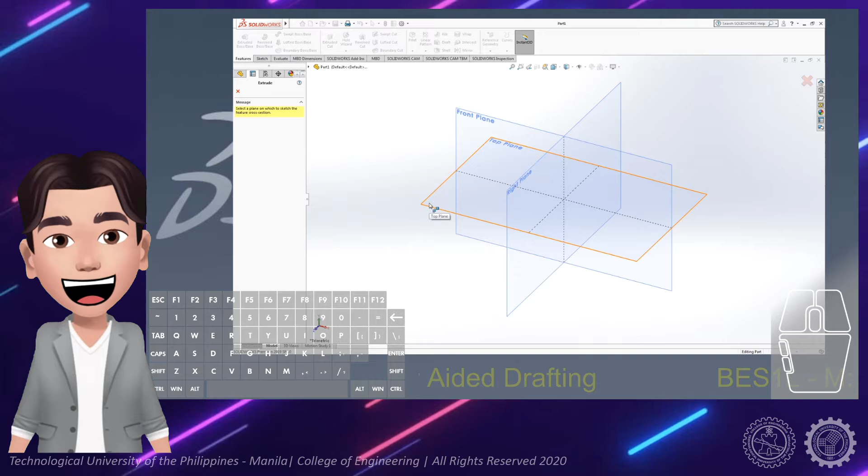Select Extrude Boss Base under the Feature tab. Then you can select from the drawing area for the initial planes, such as front, top, or right plane. Let us select the top plane.

Automatically, the drawing projects the top plane. That will lead us to the construction of the 2D base model. In our case, we will construct a 10 by 10 inches square base.

In the middle of the drawing area, you will see a perpendicular arrow, which is the X and the Z axis, and the intersection, which is the origin.

Let us construct the square using the line icon under the Sketch tab. Click the line icon. When I say click, it is the left click on the mouse, or follow the mouse button highlighted on the screen.

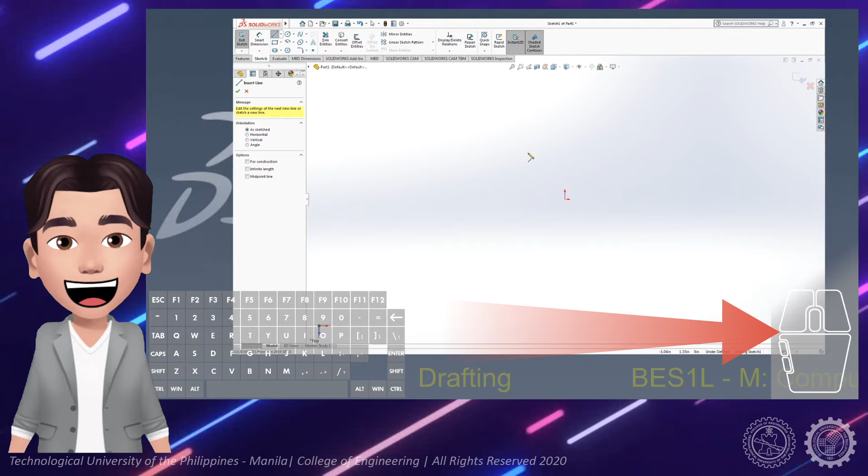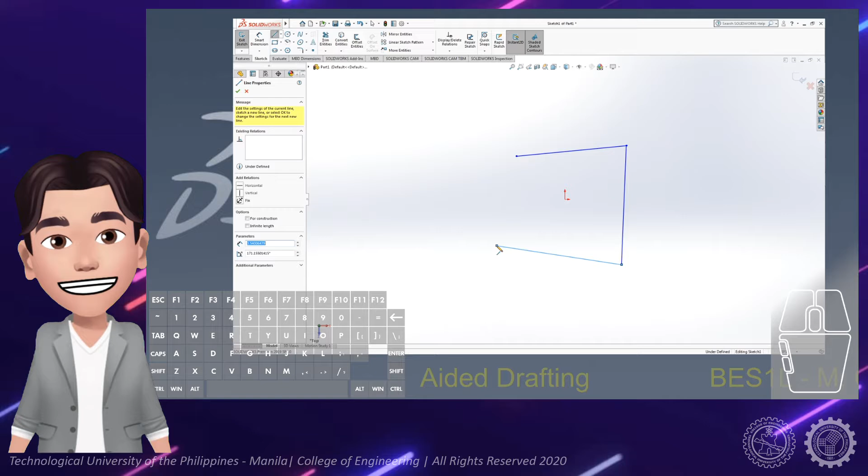Next is to select an initial position for the line on the drawing area, or the endpoint of the line. Then click another position for the other endpoint of the line. Then next is the third position, which is the endpoint of the second line. Then fourth position, and lastly, close the figure by clicking the initial endpoint.

You will see an indicator on the screen stating that you are selecting the endpoint of a line. There you have a quadrilateral, and the enclosed region is highlighted. That means it is a closed figure.

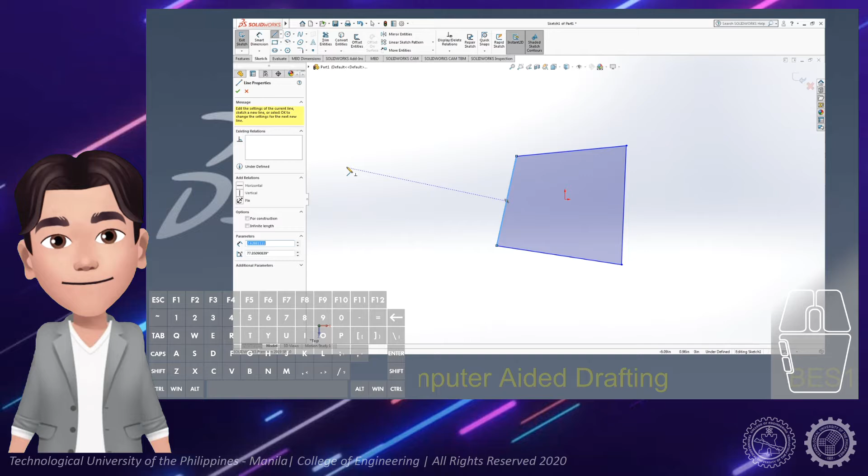Next is to make the lines horizontal and vertical. By placing the pointer on one line, then press right-click to make it horizontal. You will notice an indicator that the line is now horizontal.

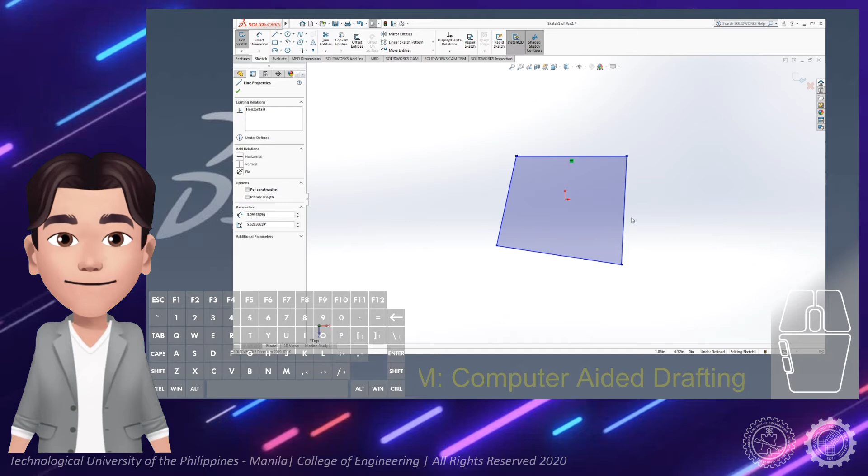Then, place the cursor on another line and press right-click. This time, we will make vertical. Do the same to the other lines to make a rectangle.

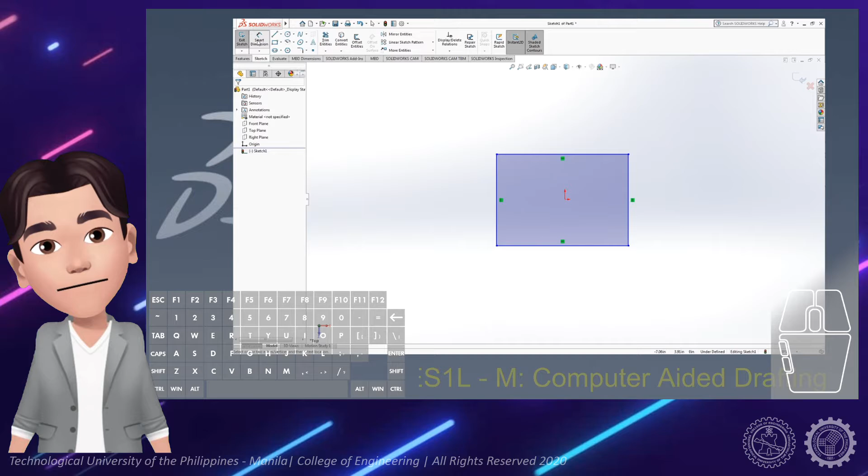To be able to make a square, let us insert the dimension in the 2D model. Click the Smart Dimension icon, then click a horizontal line and another click for the position of the horizontal dimension. Type in the dimension in the small window. Let us type 10 inches and press enter.

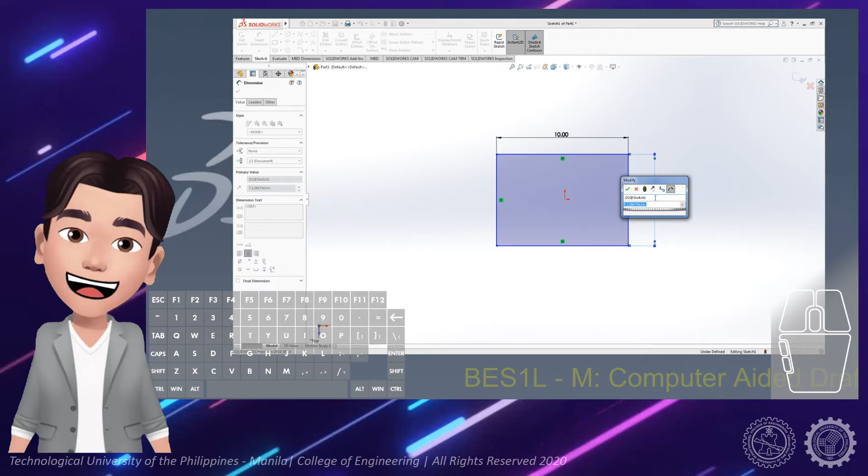Then click a vertical line and another click for the position of the vertical dimension, and type the dimension 10 inches and press enter. Press escape to exit Smart Dimension.

The lines that we have is blue in color. It means that the figure that we have is underdefined. To make it fully defined, we must have a complete dimension and must have an exact position.

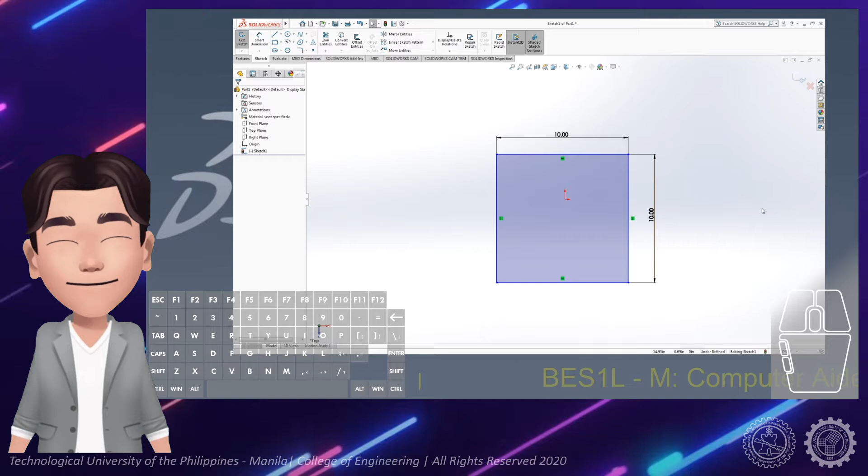Since we have a complete dimension, we only need an exact position. When we click and drag a single line, the entire square can be moved to any position, as shown in the demo. Let us have the position of the square, wherein its center is at the origin.

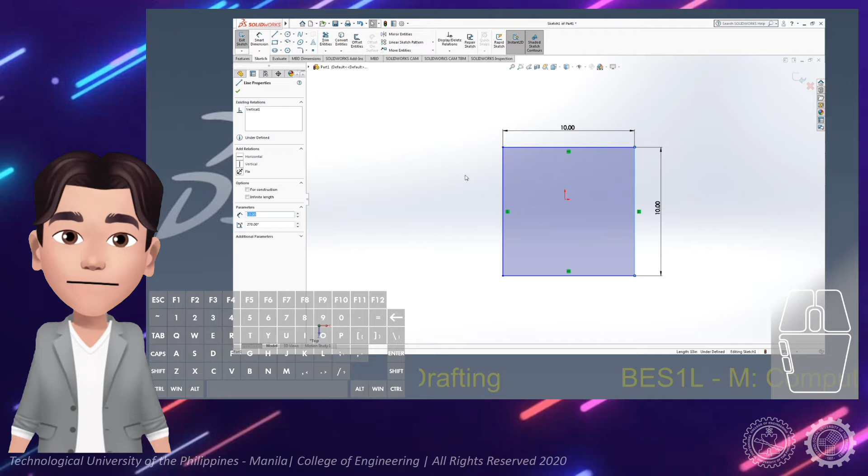To do this, we must introduce a relationship by clicking the arrow down in the Display Delete Relations, then click Add Relations. Then on the left side of the screen, you will see the Add Relation tab.

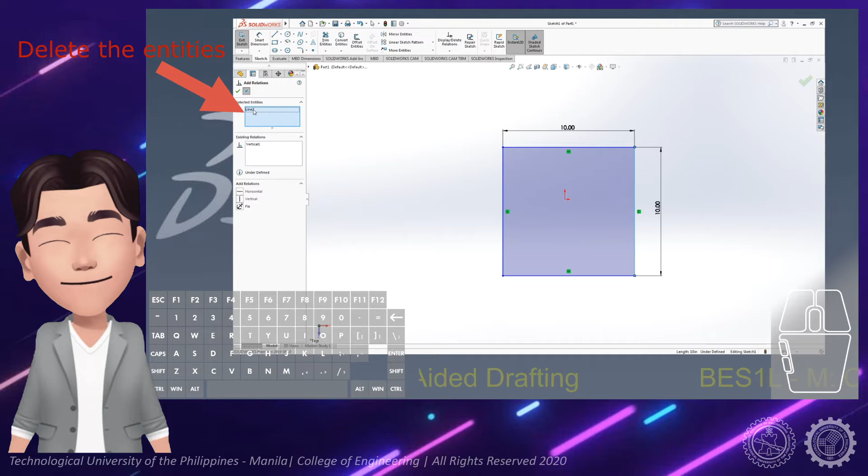Then click the origin. Next is place the pointer on the vertical line, then press right-click and select midpoint. In the Add Relation tab, click Horizontal.

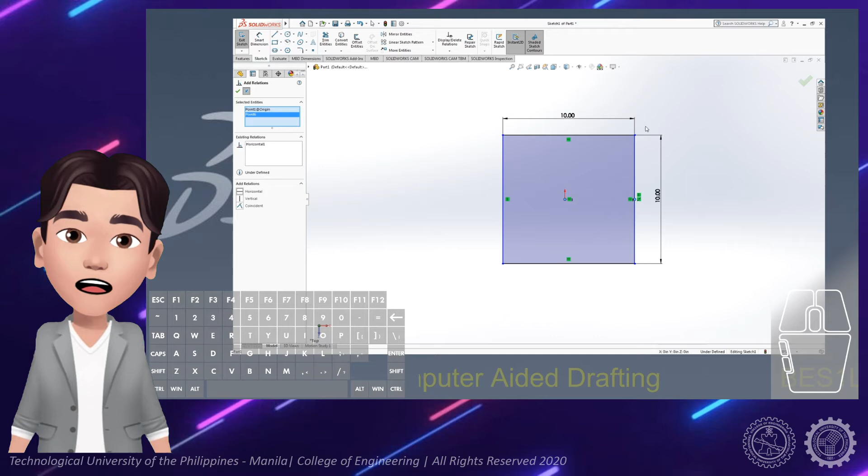Then, the vertical line is now positioned in the middle, and the horizontal line turned to black lines, meaning we can only drag or move the square to the left or right position.

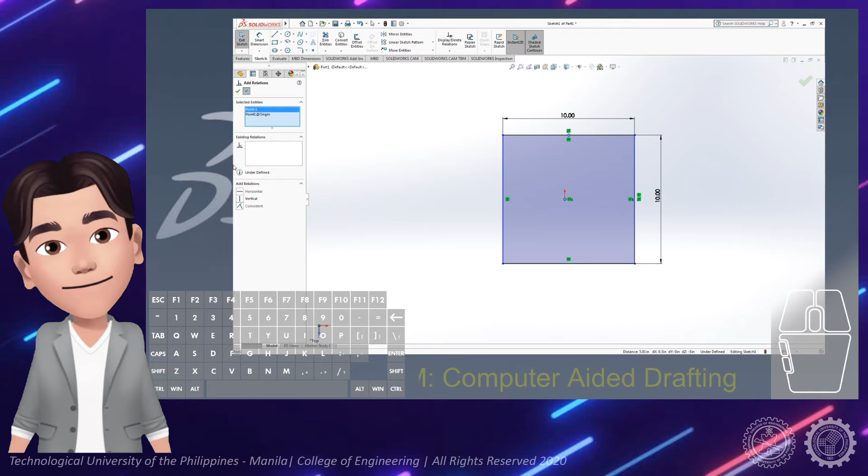Again, in the Add Relation, click the origin and select the midpoint of the horizontal line, and click the vertical align. This will make the center of the square intersect with the origin.

The lines are all black, which means that the figure is now fully defined, which is also stated on the lower right portion of the screen.

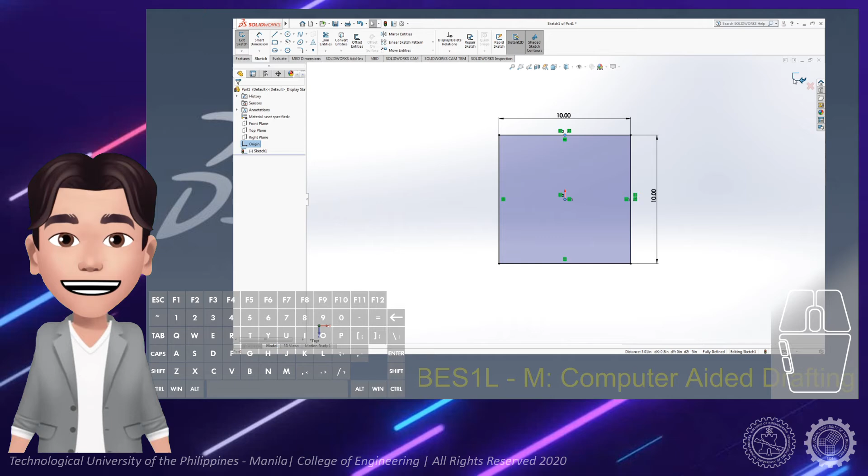Now, click the Exit Sketch button on the upper right portion of the screen. Do not press the X or the close icon.

Then the orientation will go back to the 3D view. Here, we have a flat square base. Next is placing a depth.

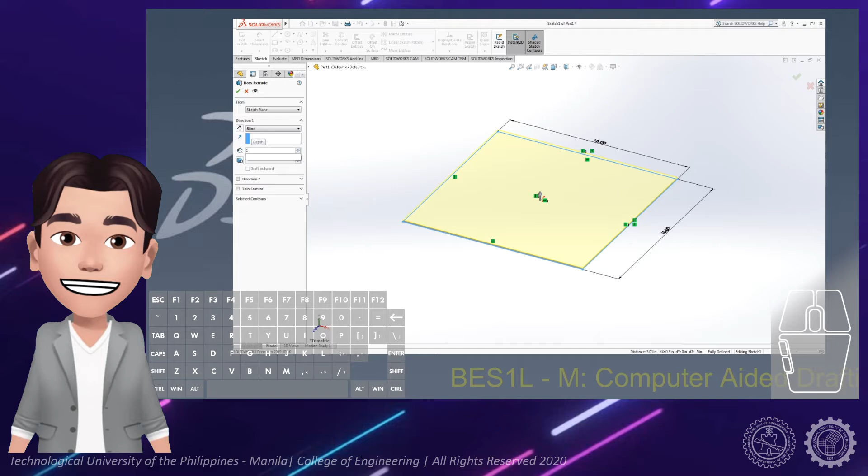On the left side, you can type in your depth. Type in 10 inches, then press enter. We will have a preview of the output cube.

By clicking the reverse button, you can have the depth pointing on the other side. But we will position the cube in the middle.

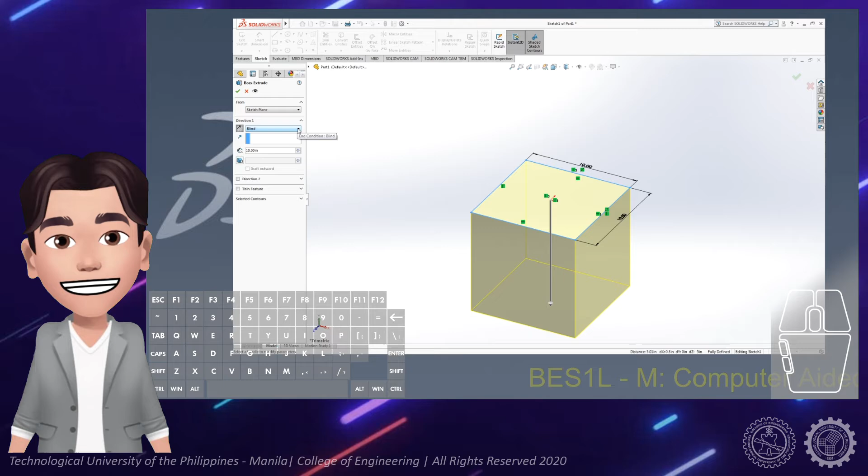To do this, click the arrow down on the blind and select midplane, and click OK or the green check icon on the upper right portion of the screen.

There you have our 10 by 10 by 10 inches cube. And the feature name is Boss Extrude 1, shown in the Feature Manager.

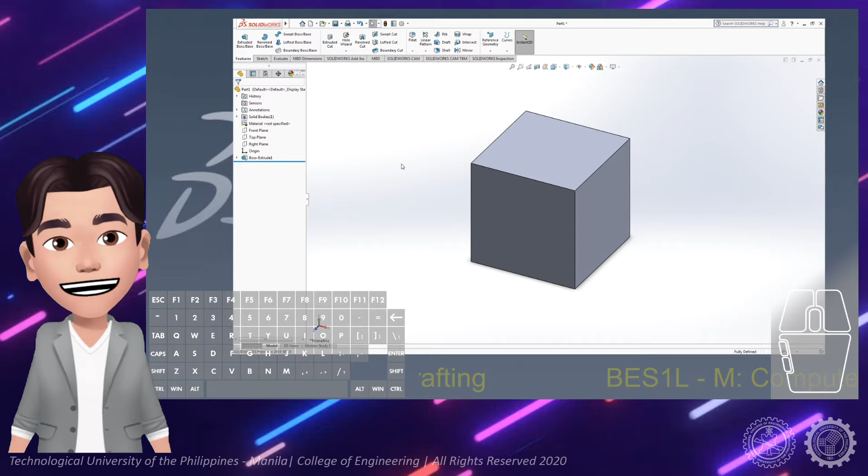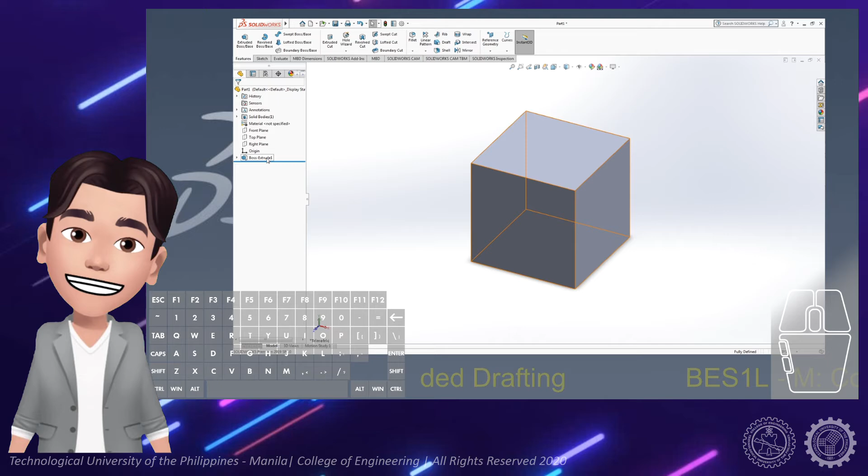What if our final model is not a cube, but instead a 10 by 10 by 5 inches square prism? We do not need to construct a new 3D model, but instead just edit our initial model. In the Feature Manager tab, right-click Boss Extrude 1 and click Edit Feature. This brings us back to giving depth to the flat square base. Change the depth to 5 inches, press Enter, then click OK. Automatically, the 3D model adjusts to the new dimension.

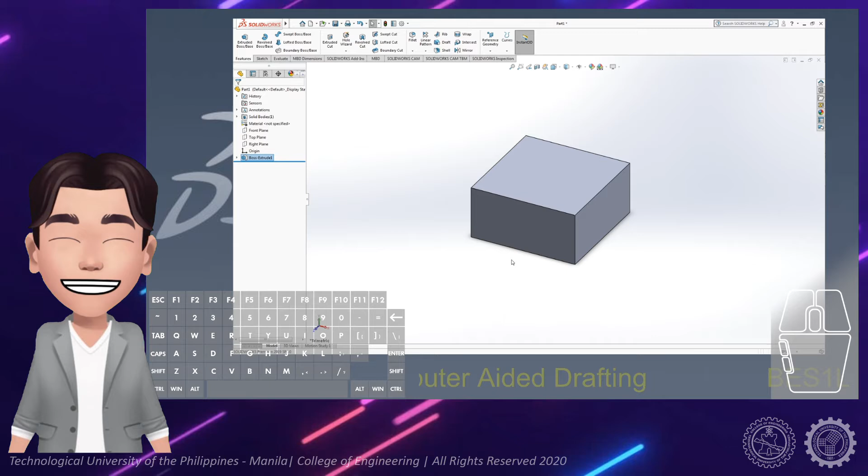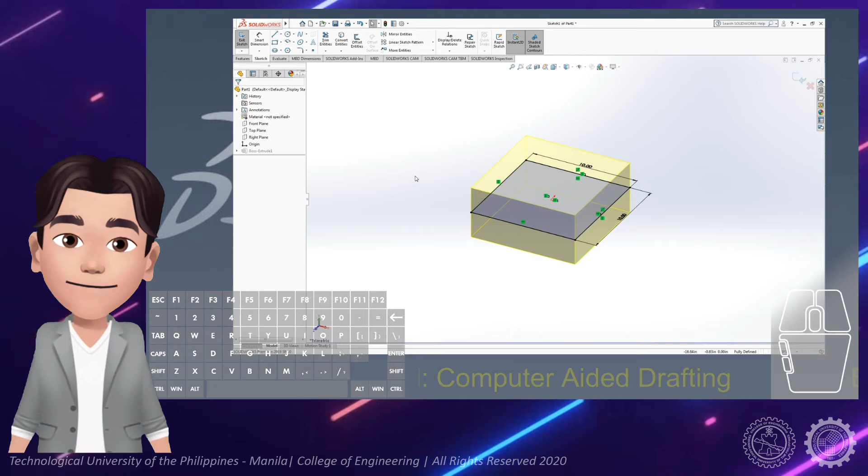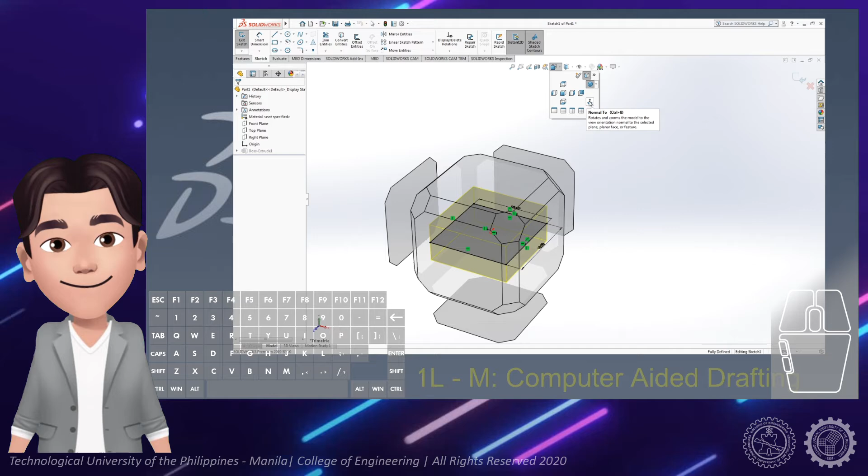But what if the base of our 3D model is not a square, instead a rectangle with dimensions 12 by 8 inches? Right-click Boss Extrude 1, and this time select Edit Sketch. This brings us back to sketch mode in 3D view. You can switch to 2D view by clicking the view orientation and selecting Normal To, or the arrow up icon. Click the dimension to edit, type 12 inches and press Enter, then edit the other dimension and change it to 8 inches. Click Exit Sketch, and now we have a 12 by 8 by 5 inches rectangular prism.

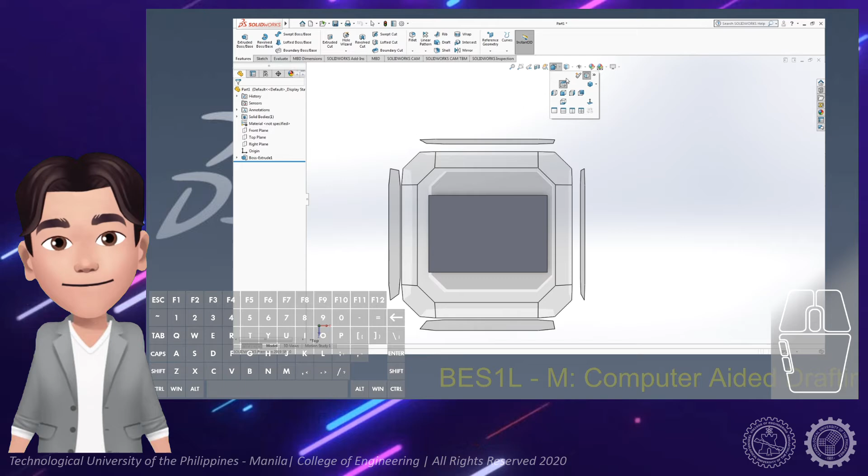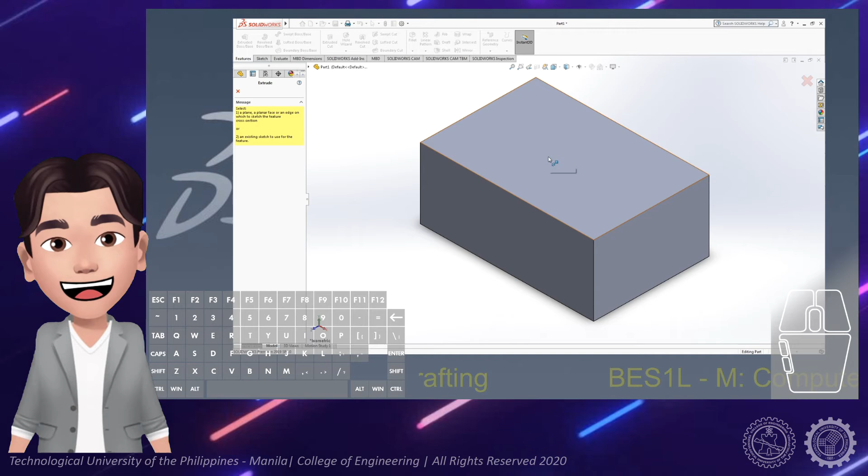Let us add a cylinder on the top of the prism with 4 inches diameter and 5 inches height. Under the Feature tab, click Extruded Boss Base again. This time we can select from the incident planes generated by the prism, aside from the initial planes we had earlier. Click the top incident plane of the prism, then click View Orientation to select Normal To, or press Ctrl 8.

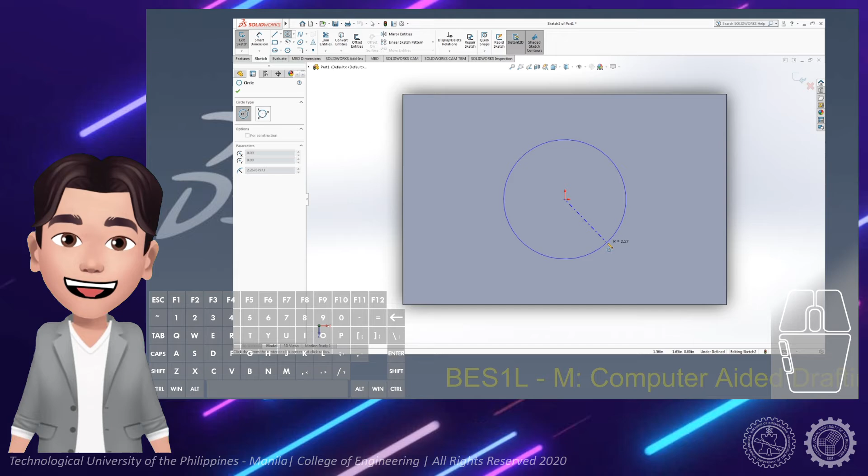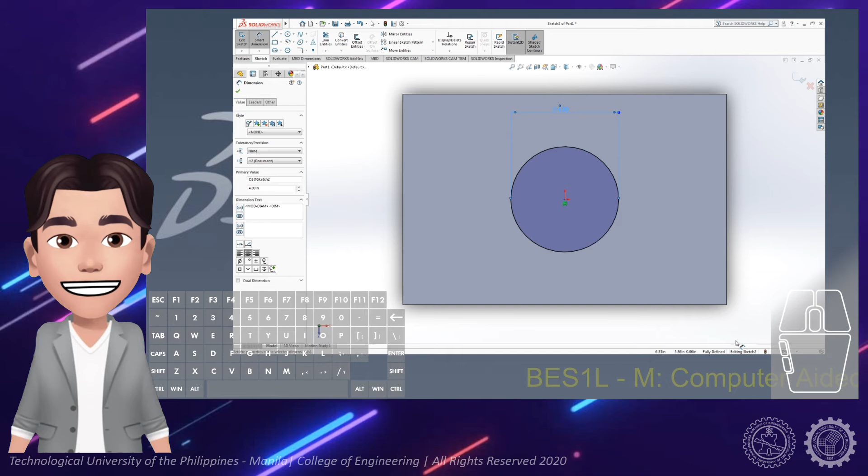Let us create a circle using the circle icon in the Sketch tab. Click the projected origin; this will be the center of the circle. Click another position to make the circle, then click Smart Dimension to introduce a dimension for the diameter, and type in 4 inches. The circle is now fully defined since we have an exact position and dimension. Click Exit Sketch—do not click the X or Close button. Then in View Orientation, click Isometric or press Ctrl 7 to view the 3D model.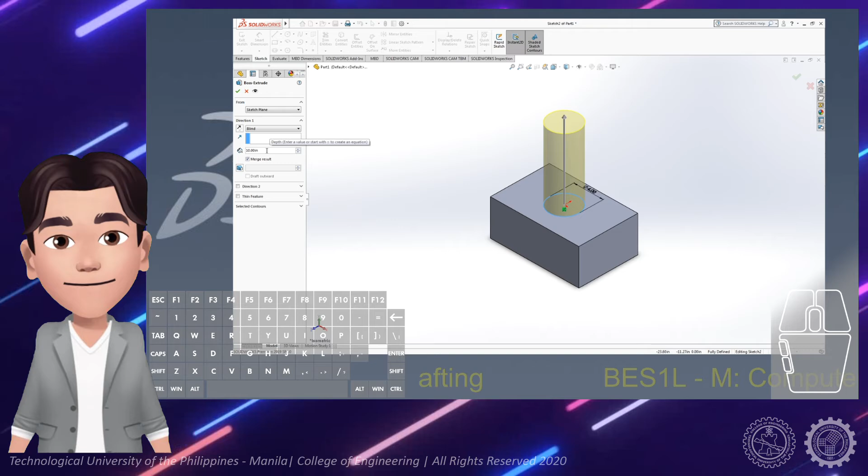Now we will introduce a depth to the cylinder. Type in 5 inches and press Enter, then click OK. Now we have added the cylinder on top of the prism. The cylinder is under the name Boss Extrude 2 in the Feature Manager.

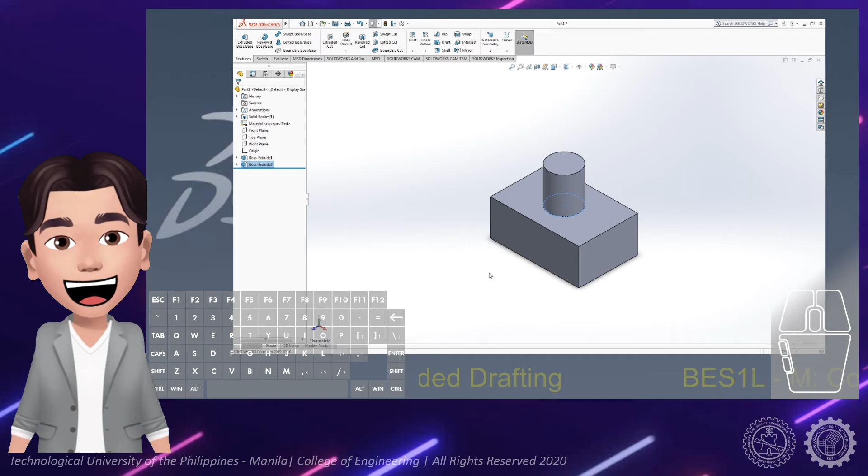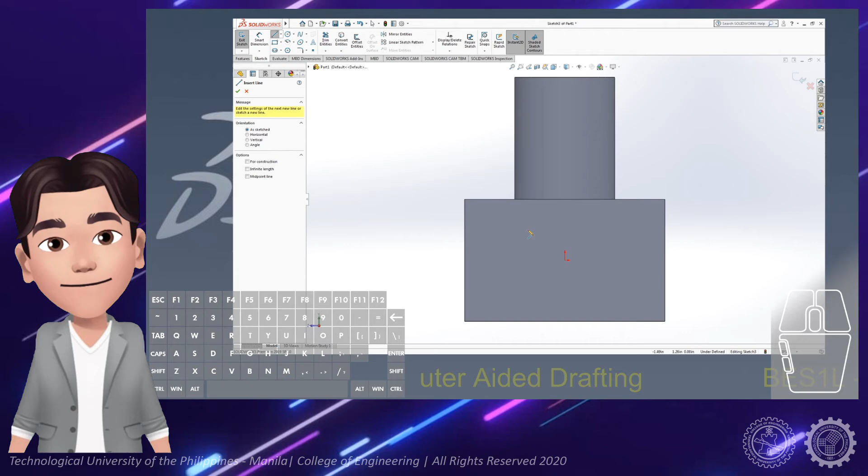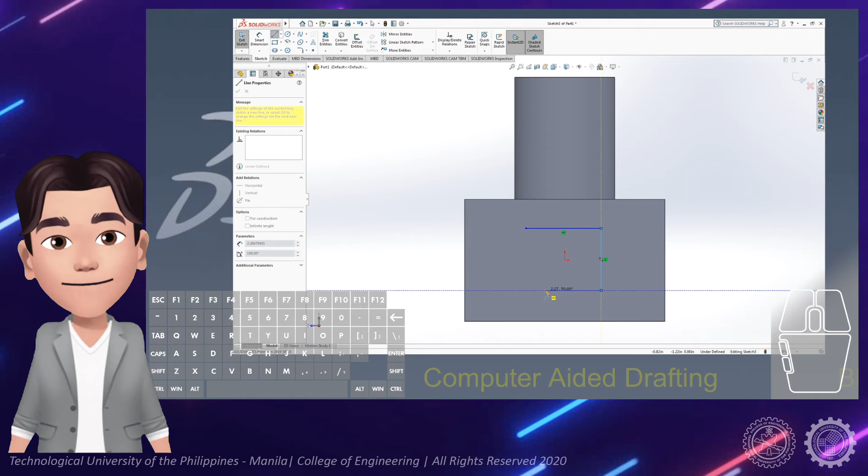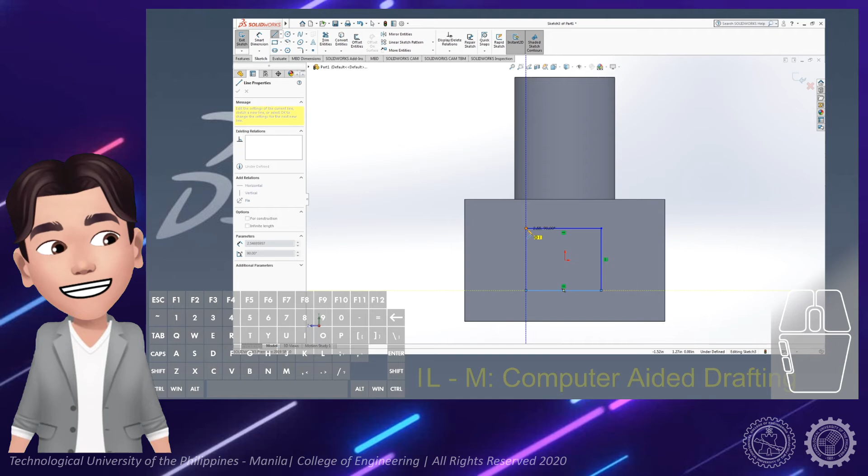This time, place your mouse pointer on the endpoint of the first line, then move it vertically down—a tracking line will appear showing the horizontal line is vertically aligned with the endpoint of the first. Close the figure with a vertical line. Click Add Relation and select all lines by making a window around them, then click Equal on the Add Relation tab.

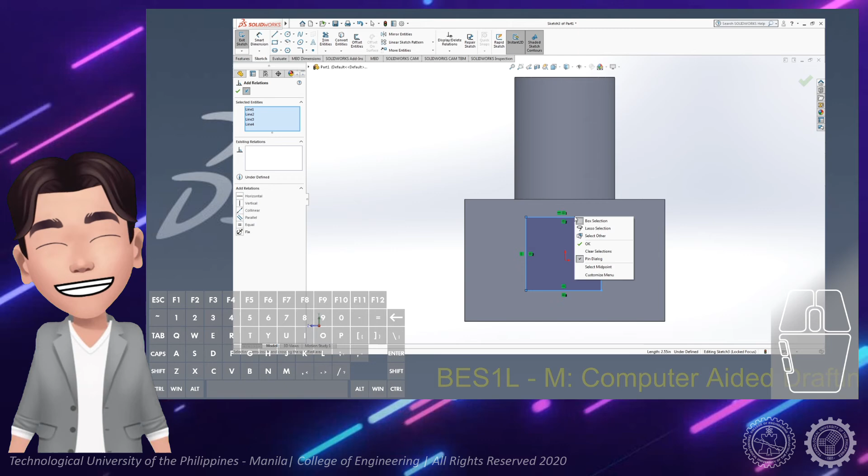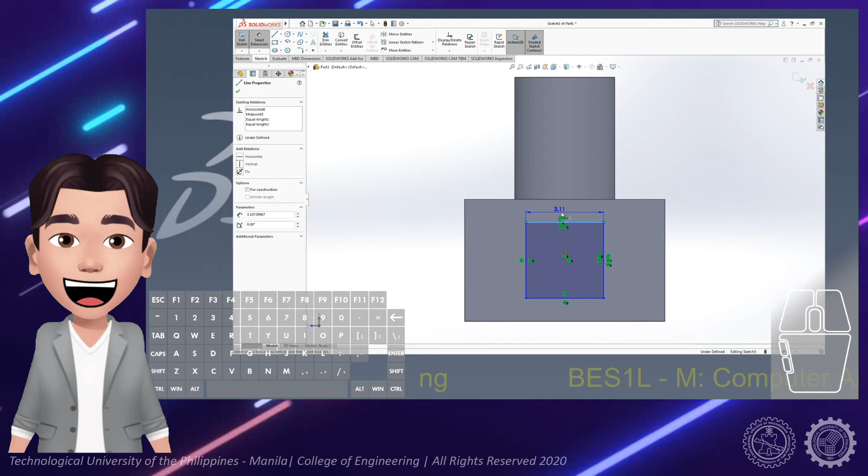Select the midpoint of the horizontal line and the origin, and click Vertically Align. Then select the midpoint of the vertical line and the origin, and click Horizontally Align. Lastly, add a dimension to one of the lines and set it to 3 inches; the rest of the lines will follow. Click Exit Sketch and press Ctrl 7 to view in isometric, then place the depth of 3 inches. There you have the cube.

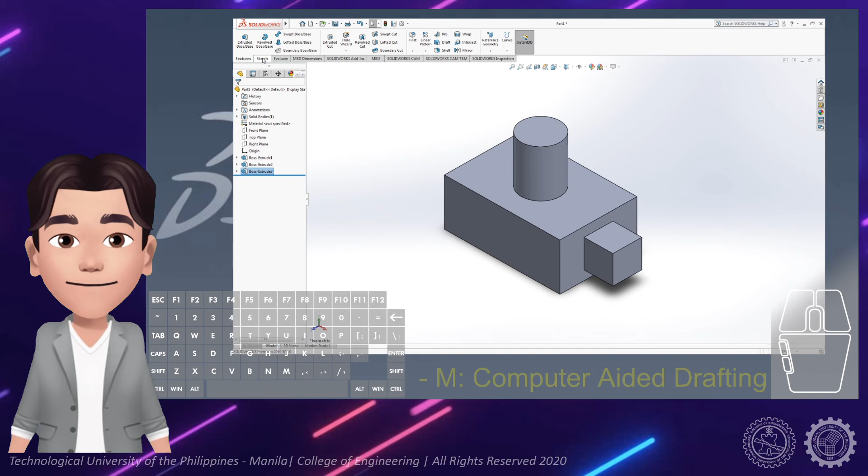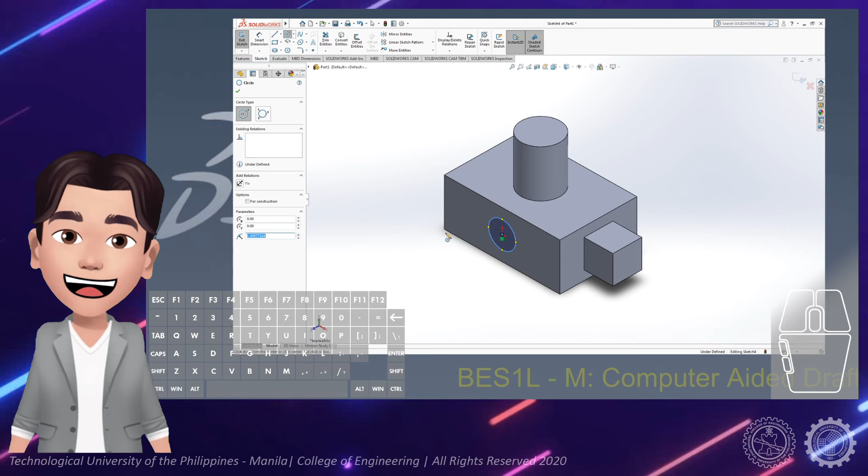Next is making a hole 4 inches in diameter in the front of the rectangular prism, positioned in the middle. To make a hole, click Extrude Cut and select the front incidental plane. In the Sketch tab, click the circle icon, set the center of the circle at the origin, then use Smart Dimension and type the diameter as 4 inches. Press Exit Sketch.

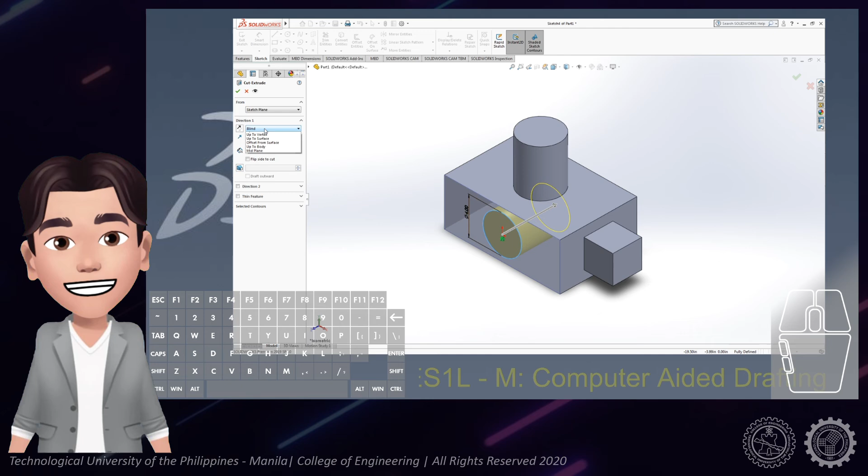You can place a depth on the hole manually using Blind, or make a hole throughout the 3D model by selecting the arrow down in Blind and clicking Through All, then OK. Now we have a hole in the front.

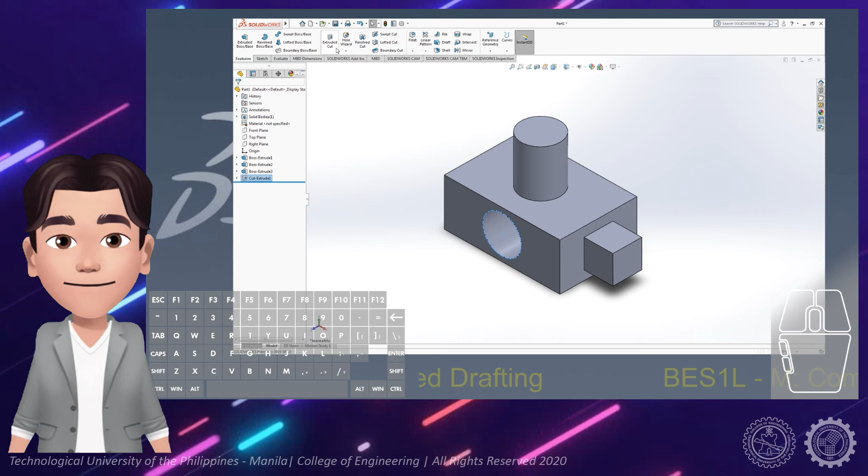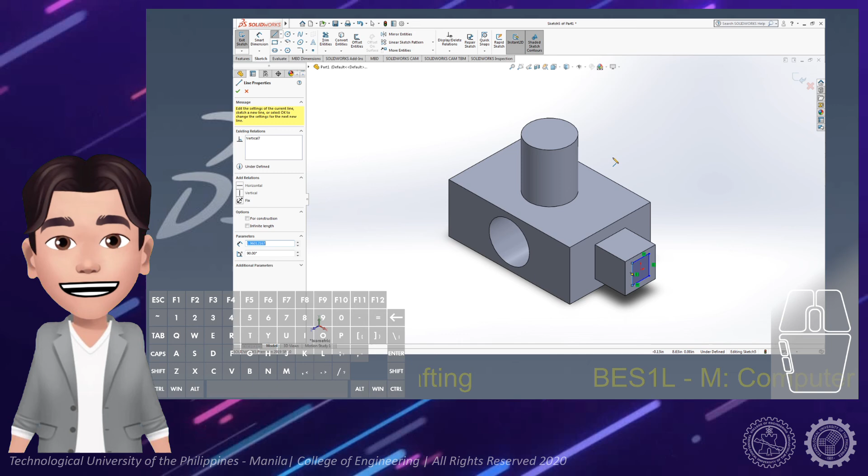Let us cut a 2 by 2 inches square on the right side of the cube, but only to a depth of 4 inches. Click Extruded Cut and click the incidental right side of the cube. Click the line icon and construct a horizontal line, then a vertical line, another horizontal line tracking the other end, and close it with a vertical line. Add relation by selecting all lines and click Equal. Place a dimension on one of the lines, set to 2 inches.

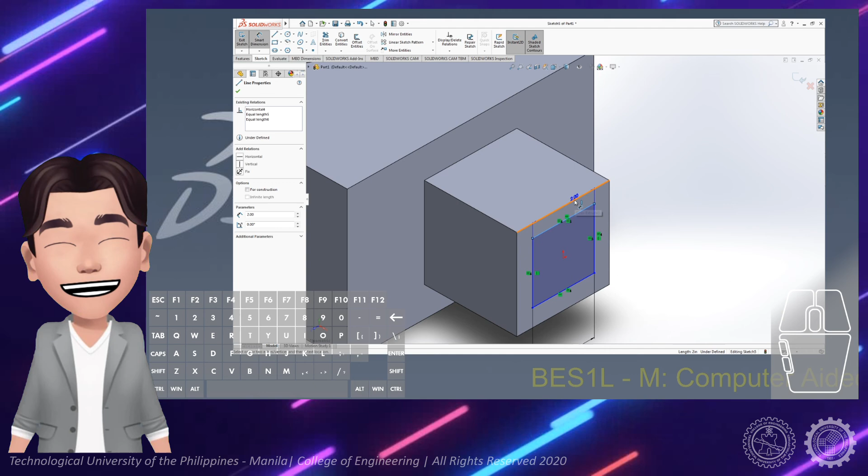Add distance between the vertical line and one vertical edge of the cube, and type in 0.5 inch. Do the same for the horizontal line and one horizontal edge of the cube, setting it to 0.5 inch as well. Click Exit Sketch, then type in 4 inches for the depth and click OK.

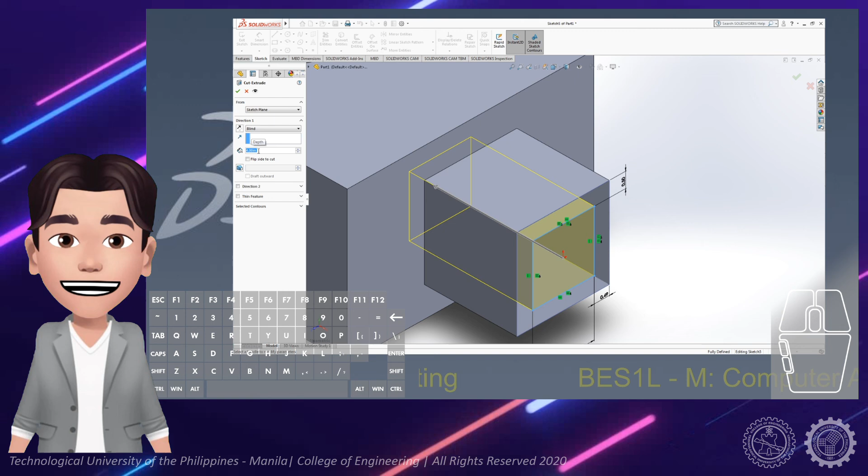There you have it, a short introduction to the part drawing environment. Thank you for watching.